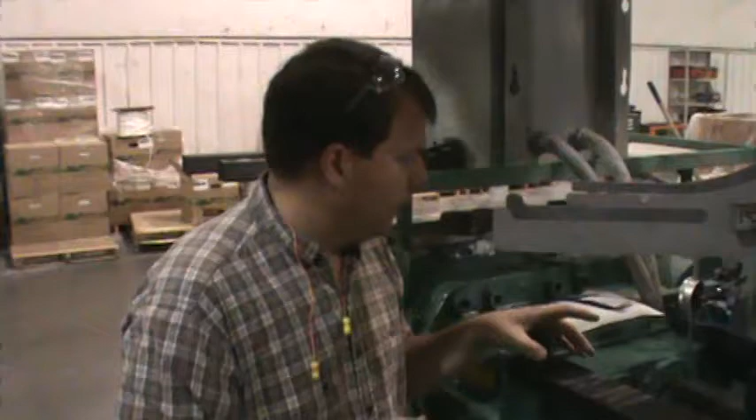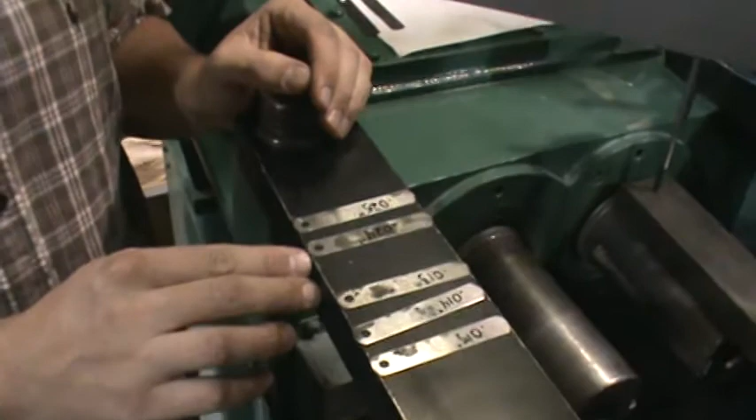Side 5, the operator side. If you'll come in here and look at these, we've got shims. We've got a 25, a 24, a 13, a 14, and a 15 thousandths shim.

This particular plug, the OD of it is 1/8 larger than the OD of the output shaft on side number 5. So that's 62.5 thousandths radially. 25 and 24 is 49. Plus 13 would make 62. Or if you use a 14, that would make 63. Or if you use 15, that would be 64. So we're going to put 64 thousandths together.

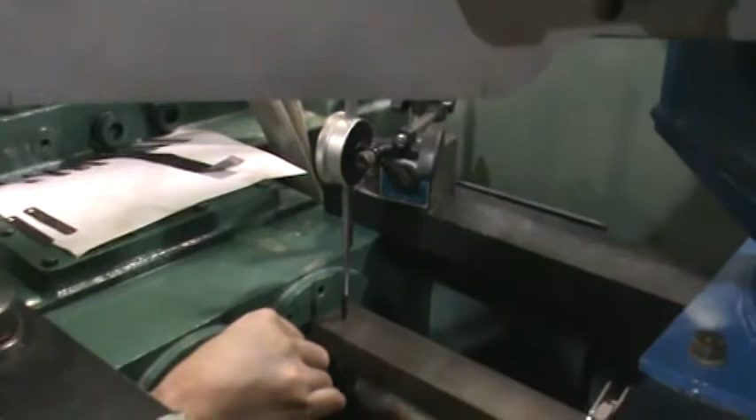And see if we can fit it underneath the Brown & Sharpe block again. As you can see over here, we have a gauge to show us. It's set on 0 right now, and that's going to show us if we are pushing this in there too hard and making that bar flex. As you can see, if I try to put 64 thousandths in, you can see it flex.

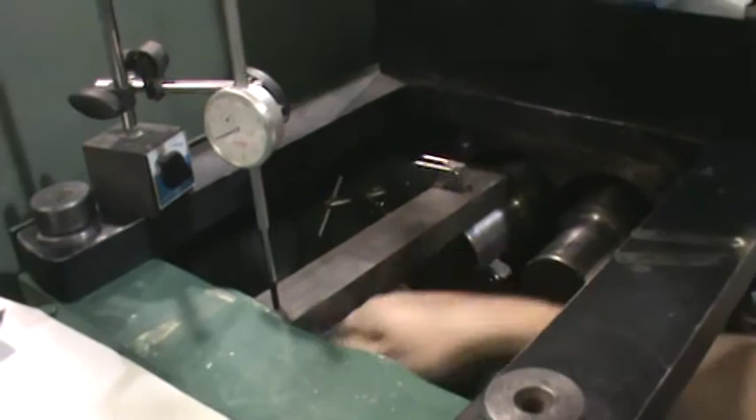So that's not the right shim. So we'll try 63 thousandths with a 14 thousandths feeler gauge, and we really get no movement right there. But as I get to right here, it gets tight on me. So I take that out and I use a 13 thousandths gauge, which represents 62 thousandths, and I can go the whole length in and out with no movement of the gauge.

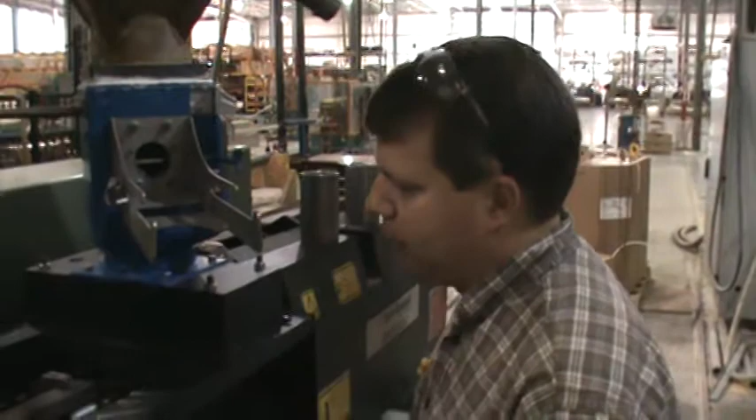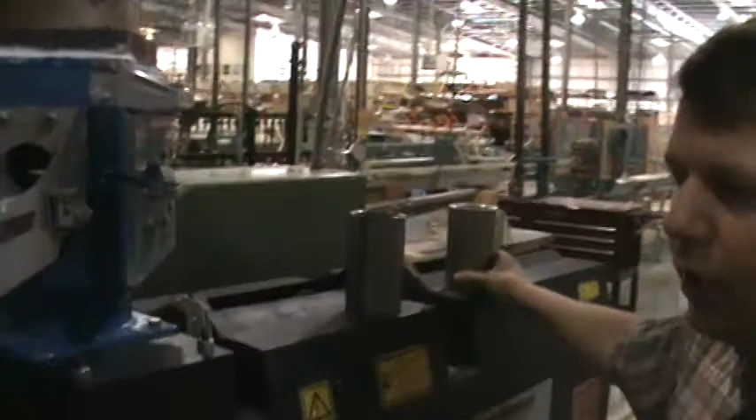Now we're going to move on and put our alignment sleeves on that go into the plugs. Let me give you a piece of paper here. You can see this piece of paper. What Heath has done is put the numbers of the sleeves for side 5 and side 3, and he has put the numbers of the output shafts for side 5 and side 3, and side 5 of the plugs.

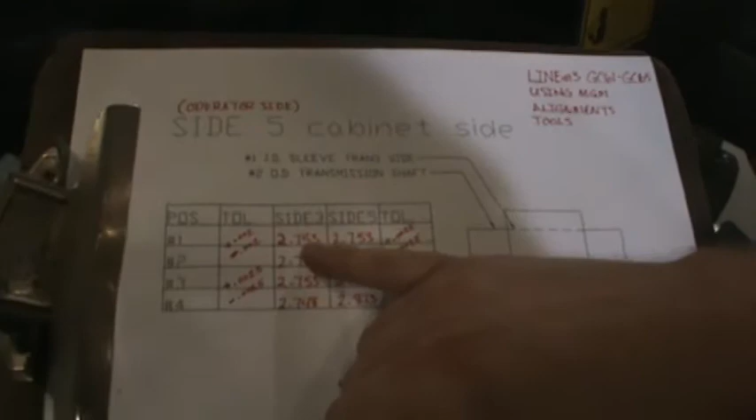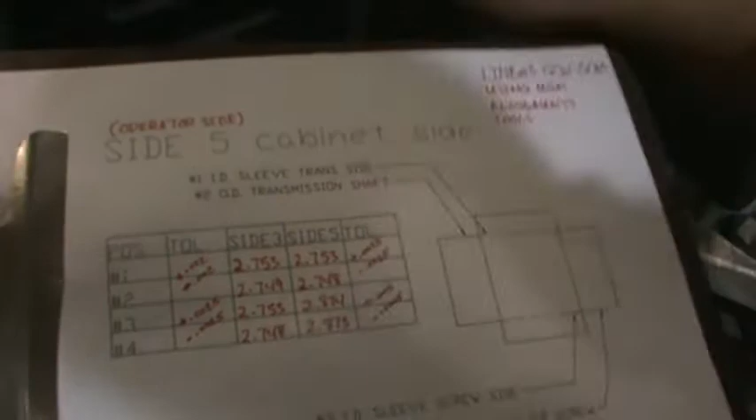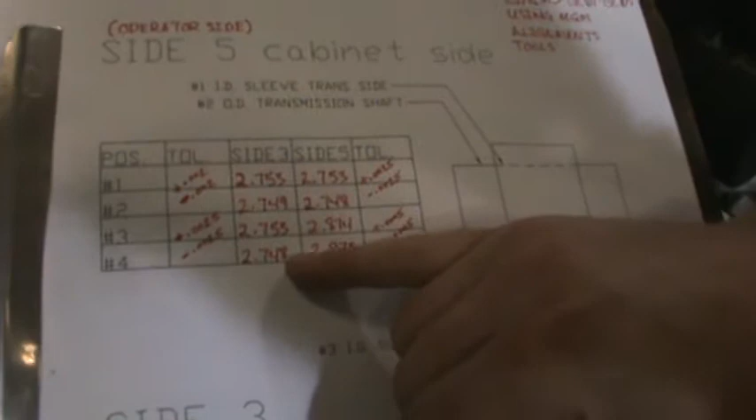So if we look at this, on side 3, which is this side right here, we have the ID of the sleeve is 2.753. The OD of the output shaft is 2.749. That's plus or minus 2 thousandths. Now, still on side 3, we are looking at the plug and the sleeve. The sleeve ID is 2.755, and the plug OD is 2.748. That's plus or minus 2.5 thou.

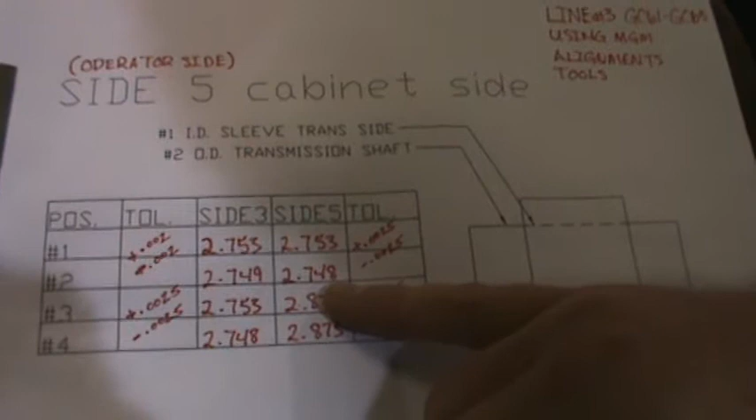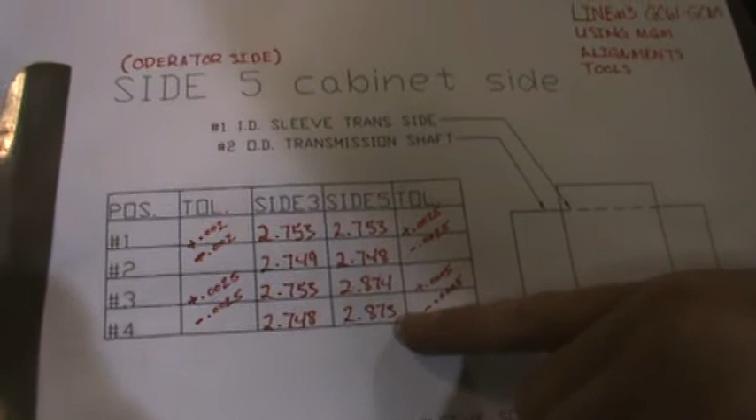Now we go over to side 5, and on side 5, the ID of the sleeve is 2.753. The OD of the output shaft on the transmission is 2.748. That's plus or minus 2.5. Now, this sleeve is a step sleeve, so the ID of this part of the sleeve is 2.874, and the OD of the plug is 2.875. That's just plus or minus 0.5 thou. So we expect that's going to be pretty snug on there.

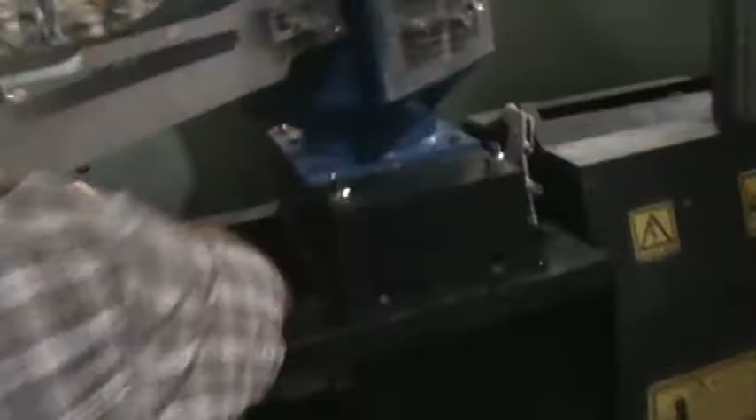Now what we're going to do is make sure there is no dust or anything. We'll go ahead and take this gauge off. Got that nice indicator up there. We'll take these clamps off. Now these plugs have been seated in this barrel.

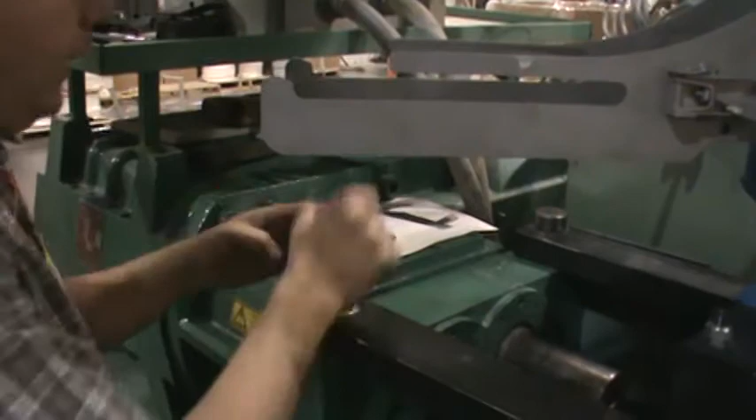Put those away. We'll put our shims away for right now. Then we'll take our pins out. As you can see, the pins come in and out really easily. But as we move this barrel in and out, it still has the opportunity to go backwards and forwards, because this detail right here has a slot in it. And so as we move this barrel in and out, it's going to move in that slot. We'll have to reposition.

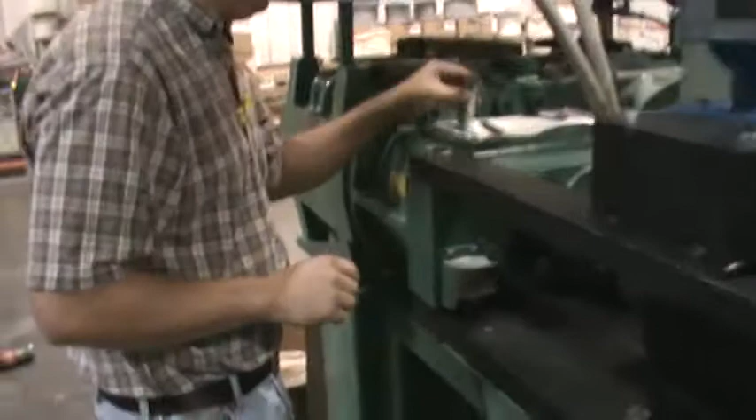So we made sure everything was clean, and now we're going to pull it out. We're going to go ahead, make sure side 5 alignment sleeve is nice and clean. It is. Go ahead and put it on the output shaft. We're going to take side 3. Make sure it's nice and clean.

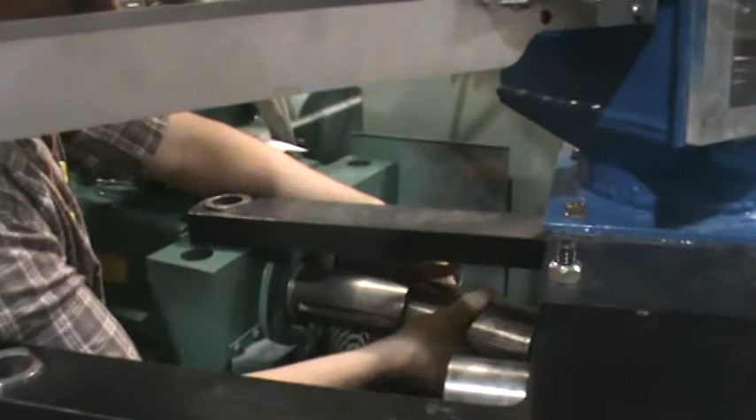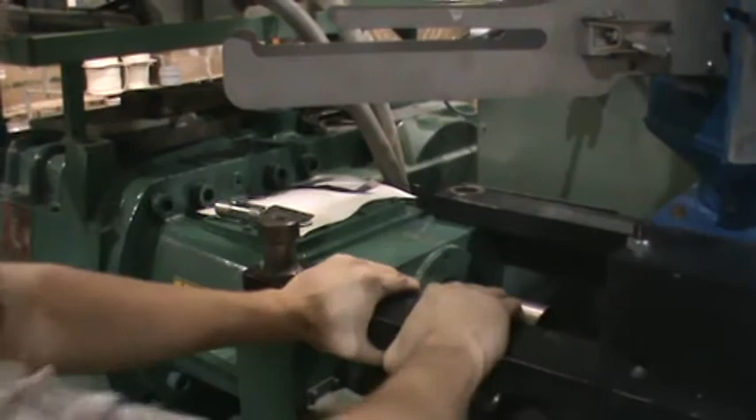Everything has been stoned, wiped down, polished to make sure that we don't have any debris, any nicks, anything like that getting in our way. We rotate it back. Take the sleeve, take the pin, wipe it down. That goes in there pretty good. That will take up. There we go.

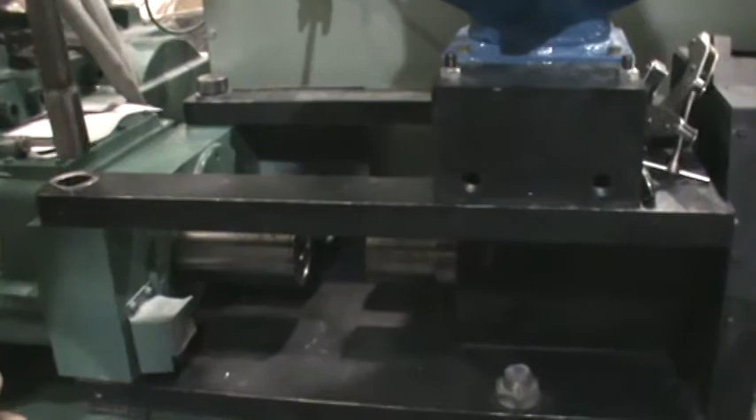Take this here, put this pin in. What we'll do is just make sure now it's got itself back in line where it needs to be. So we can show that those are moving where they need to be, and they're also pinned in position.

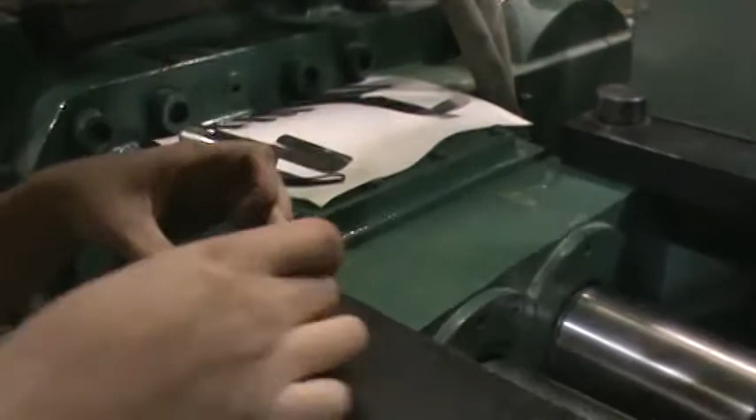The pinning of these eccentrics is actually the last thing we do. And how we do that, after we get everything set up, we rotate this to where the eccentric is tight against the pin. So we rotate it back. Looking at that line right there, we make a scribe on the furthest extent we can rotate the eccentrics. So we move it to the midpoint, and then we pin it. We do that for both the top and the bottom.

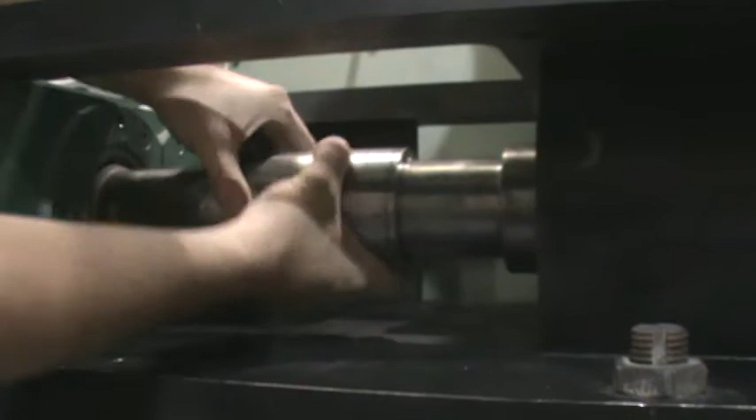So right now, with the tolerances we gave you, with the Brown & Sharpe bar showing how close we were, we should be able to slide these couplings on here. And we're able to do it like that. Now this one has a very tight tolerance of plus or minus half a thou, so it's going to be a little bit snug to get on there. As you can see, as we come down there, it's a little bit snug, but it goes on there nice and smooth. And this one is nice and smooth too.

So with those on there, we want to make sure our pins still come in and out very nicely, which they do. If these sleeves were in a bind with the plugs and the output shaft, which we have seen in the past, these pins would not come out. They'd be very hard to come out. Once you relieve the binding on them, then your pins would be able to free up and come out.

So one important thing is get your sleeves on there. We got our sleeves, pins come in and out nice and free. So everything is tightened down, everything has been clean. What we'll move on to this point is actually putting in our screws. We can be assured now that everything is lined up where we want them. That's about it for right now.